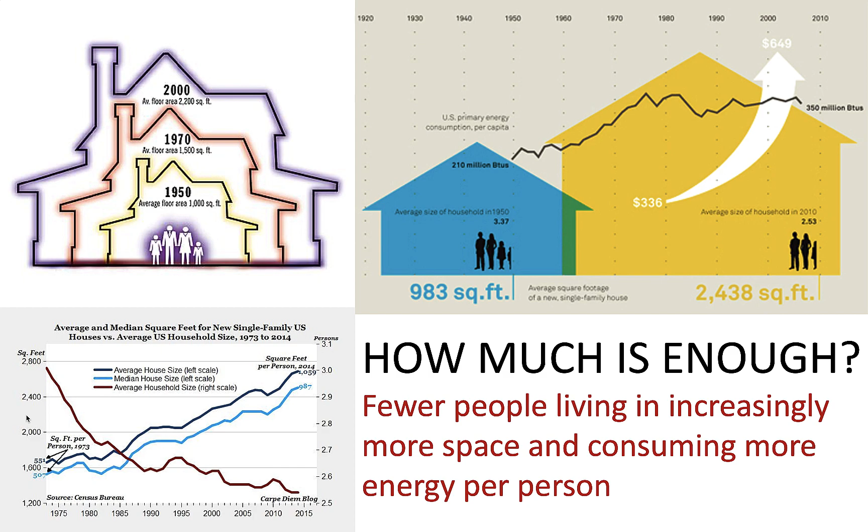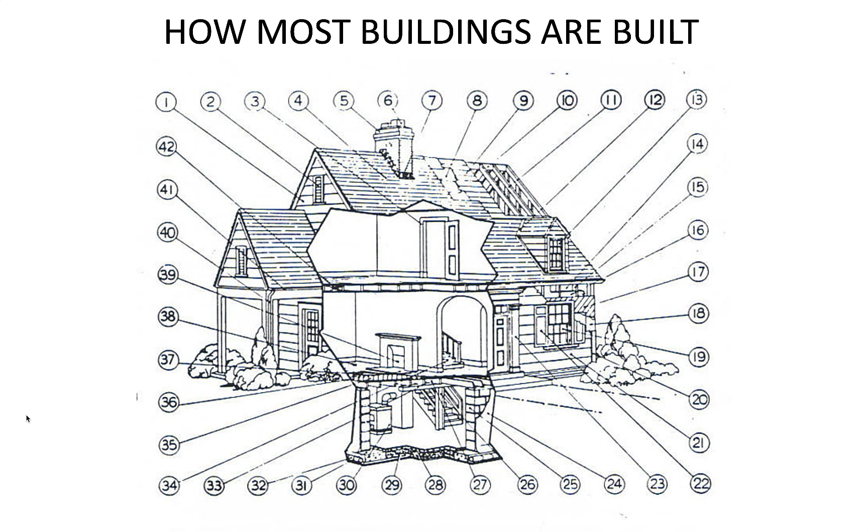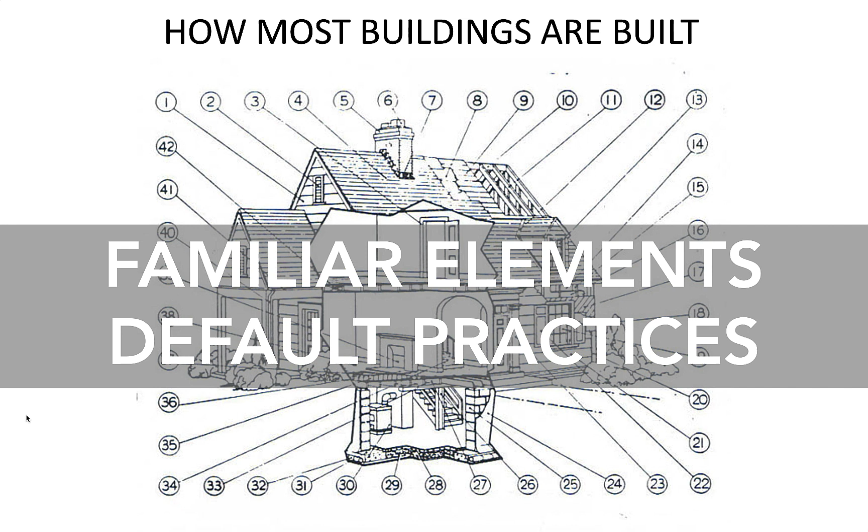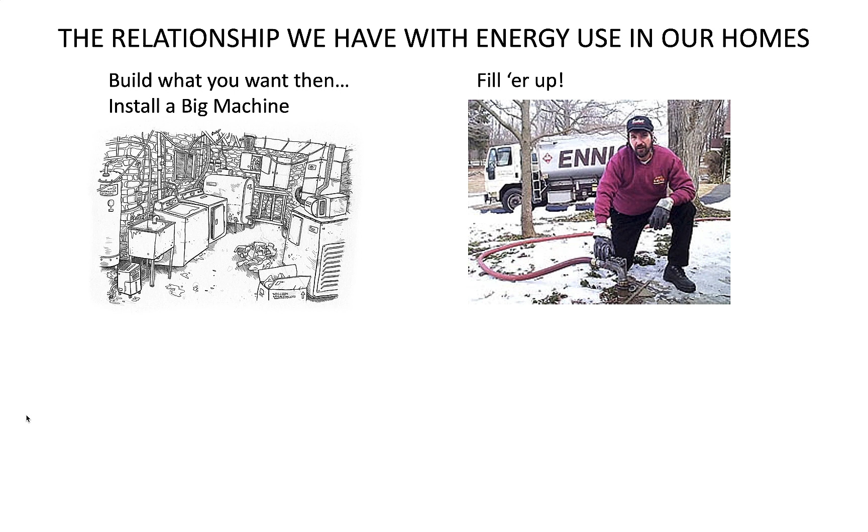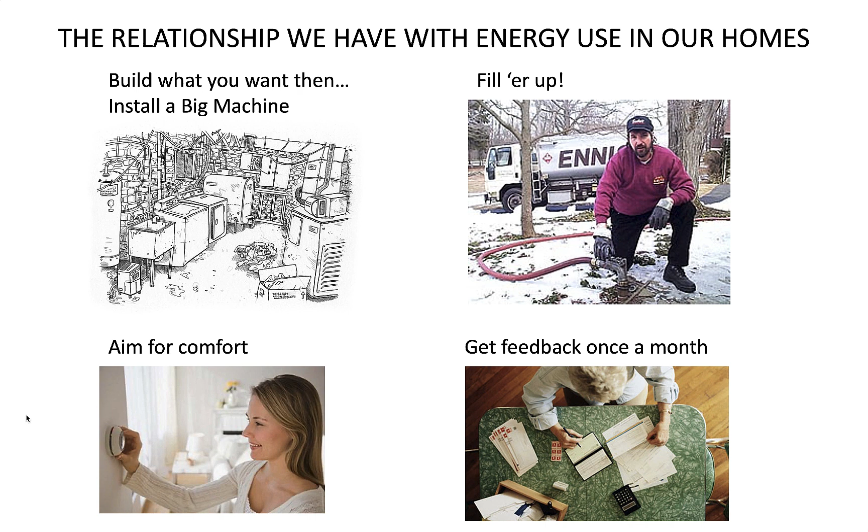One of the reasons homes aren't built this way is because, especially here in the land of steady habits, we tend to keep building the way we've been building, with familiar elements and default building practices. We also build based on a familiar and unquestioned relationship we have with energy in our homes: build what you want, then install a big machine to keep you warm, or at least try to. To keep it running, just fill her up. Then use that dial on the wall to aim for comfort. And every month, we'll get feedback on the cost to maintain that comfort.

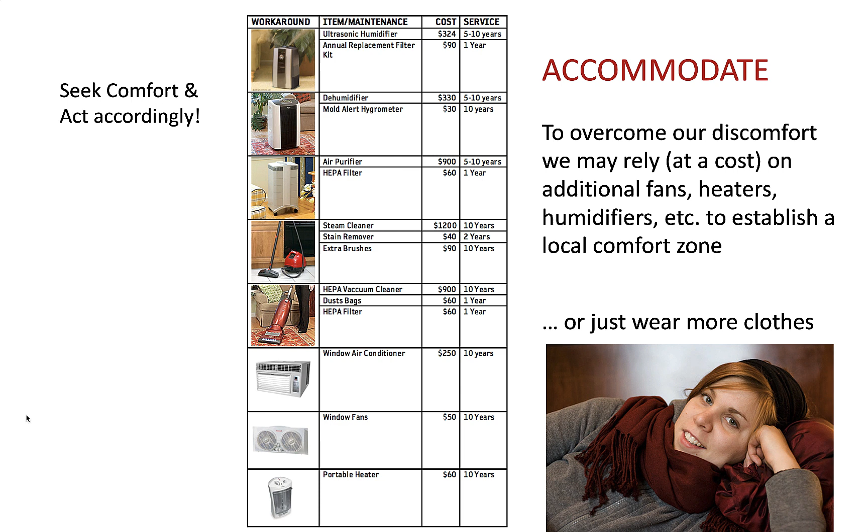This relationship is essentially baked in when the house was built. With that comfort or discomfort equation baked in, we may rely, at a cost, on additional fans, heaters, humidifiers, etc., to establish room-by-room comfort zones. Or maybe we just wear more clothes.

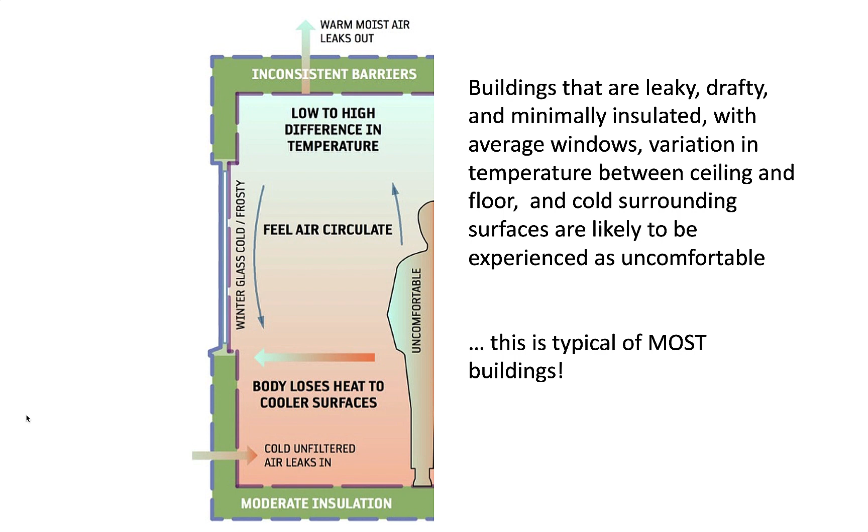This is an illustration of how most homes are designed to perform, with moderate insulation, all kinds of hidden locations that leak the air we are paying to warm and simultaneously draw in cold, unfiltered air. You may feel cold standing next to a window, and the temperature varies throughout the house. We actually feel colder in these homes because our bodies lose heat to the cooler surfaces, and drafts and circulating air feel uncomfortable. By making integrated improvements to the building envelope and mechanical systems, we can provide a more dependable comfort field.

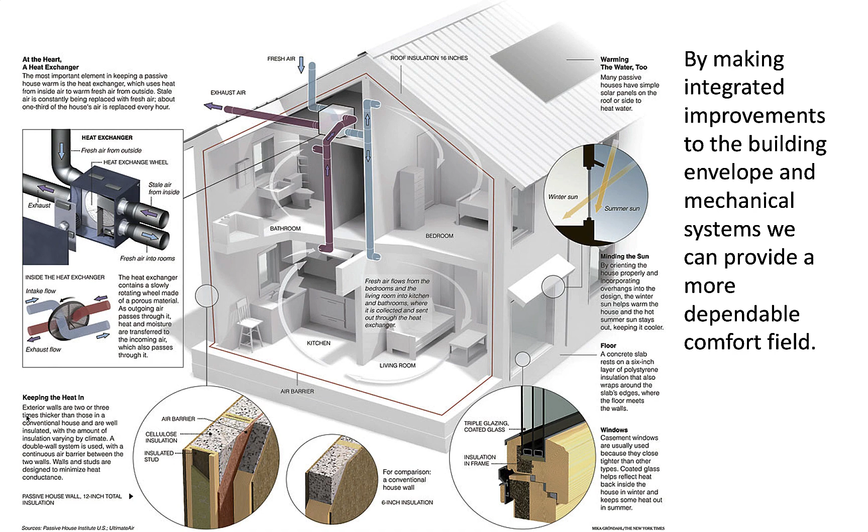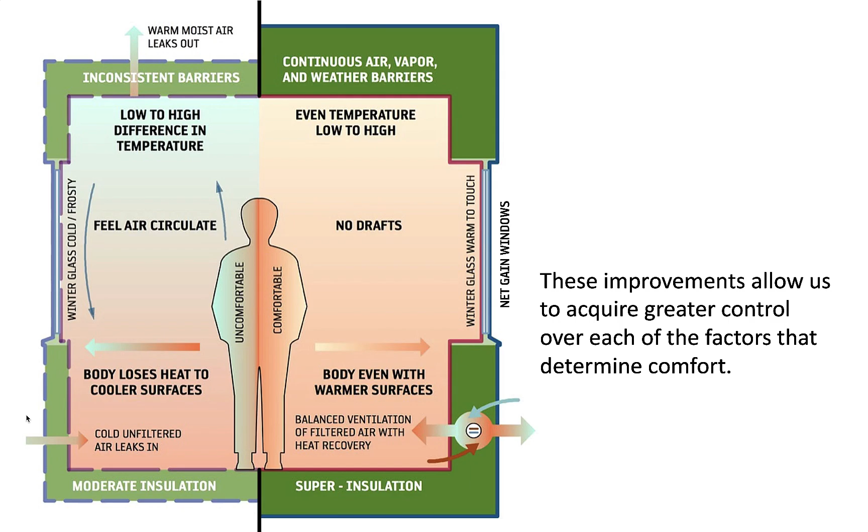With twice the insulation, continuous air, vapor, and weather barriers, efficient windows that can harvest the sun to gain as much energy as they lose, a balanced ventilation system for constant fresh air, and even temperatures everywhere with no drafts and warmer walls, we have gained control of all the factors that determine comfort. And while all of this is a result of adhering to the basic principles of physics, what we value is this: we can be considerably and consistently more comfortable in our homes.

Because perhaps most importantly, there's no place like home. Our home is not just a machine, it is a harbor. Our homes provide us with shelter and security, comfort and well-being. They provide services that meet our practical needs. And hopefully, they delight and renew us, nourish our social relationships, and are often the hub of our active lives. Our homes can also and should sustain our well-being.

Our homes are also a load we carry, and one of our intentions when we build is to lighten that load. Here's an explanation.

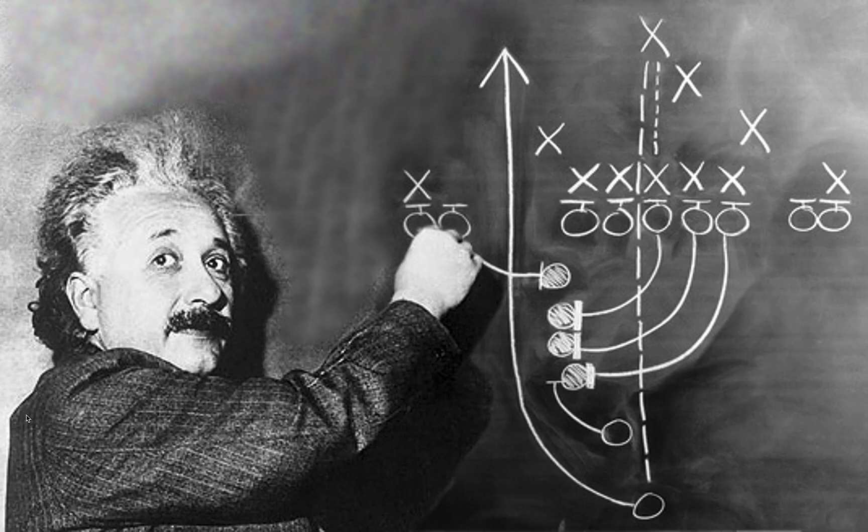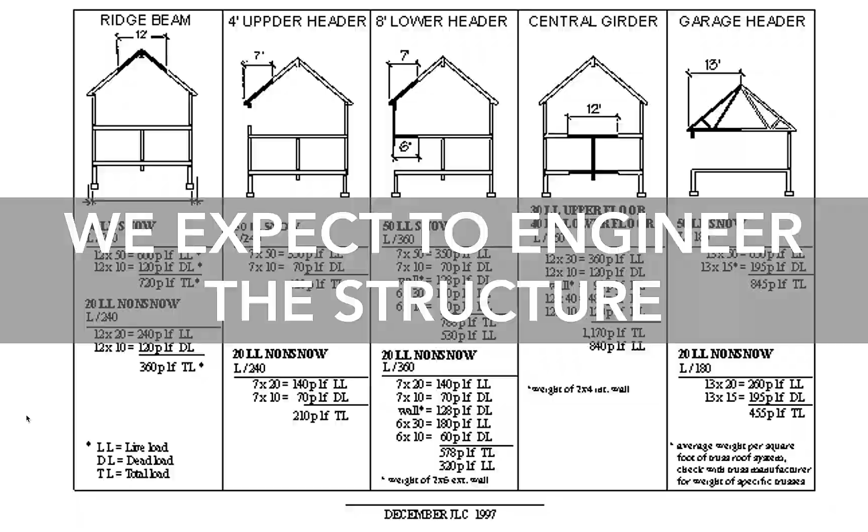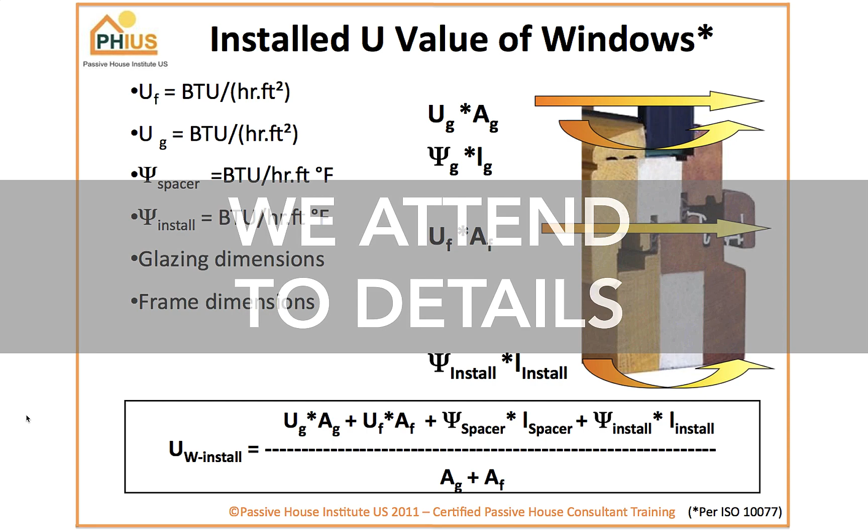So, how do we build differently? For starters, just as for every home, we expect to engineer the structure. For these homes, we engineer performance. We do the math, physics again. And we attend more carefully to all the details.

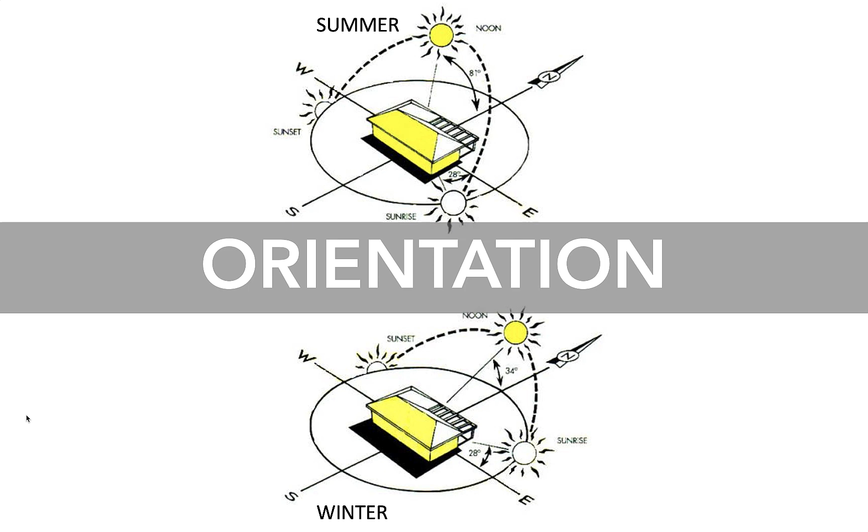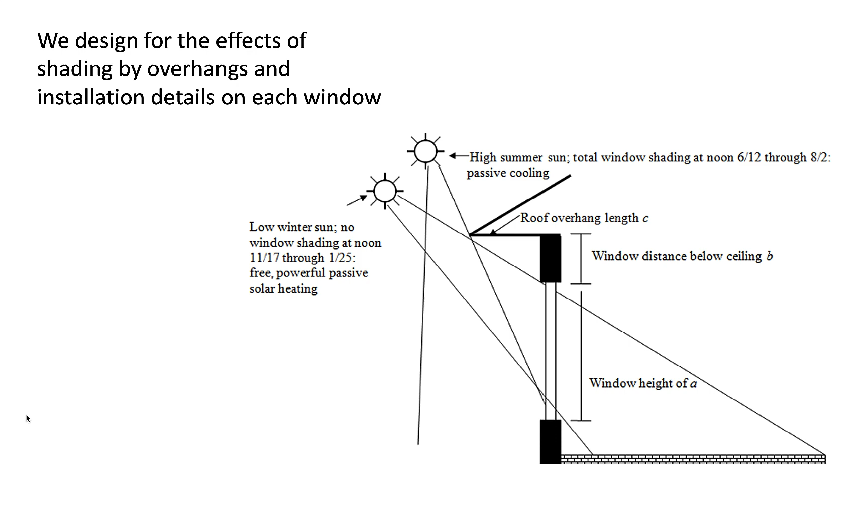We begin with our building site. Since we intend to harvest free energy from the sun, we locate the building to capture all we can. We designed for the effects of shading with overhangs that welcome winter sun and, like the visor on a cap, keep out summer heat. We favor simple, compact forms with the least surface area for the most living area, complicated shapes being less desirable.

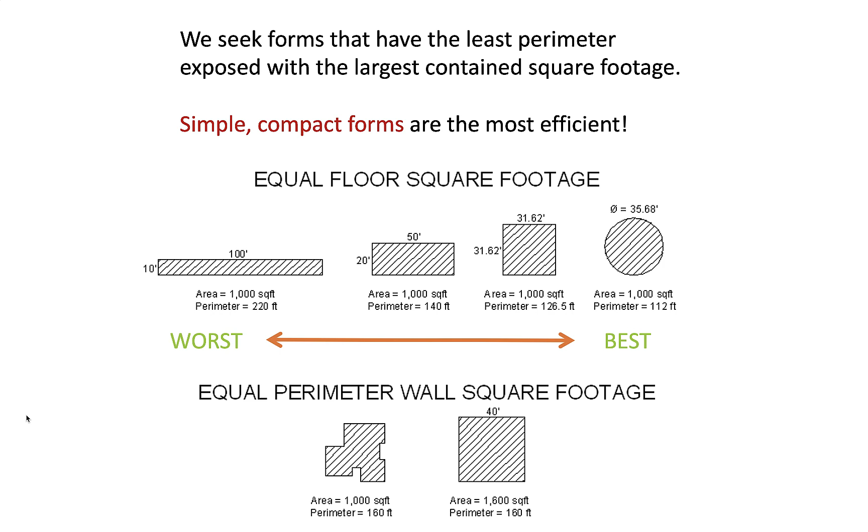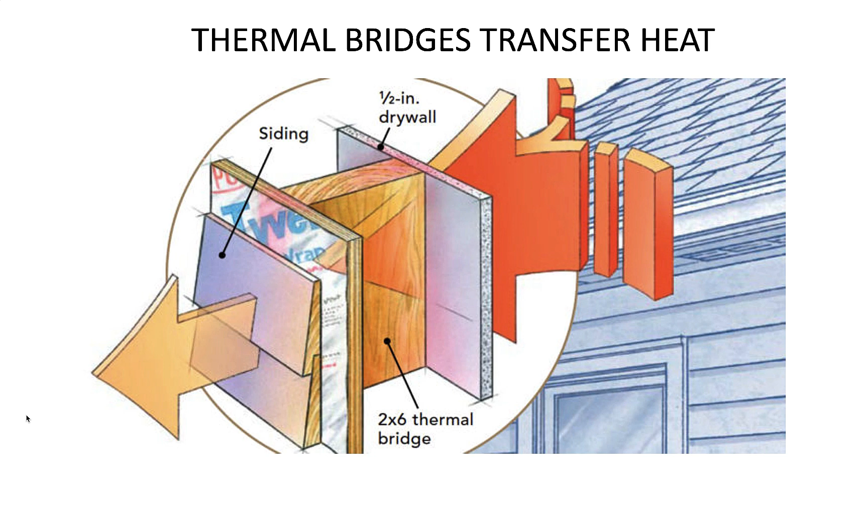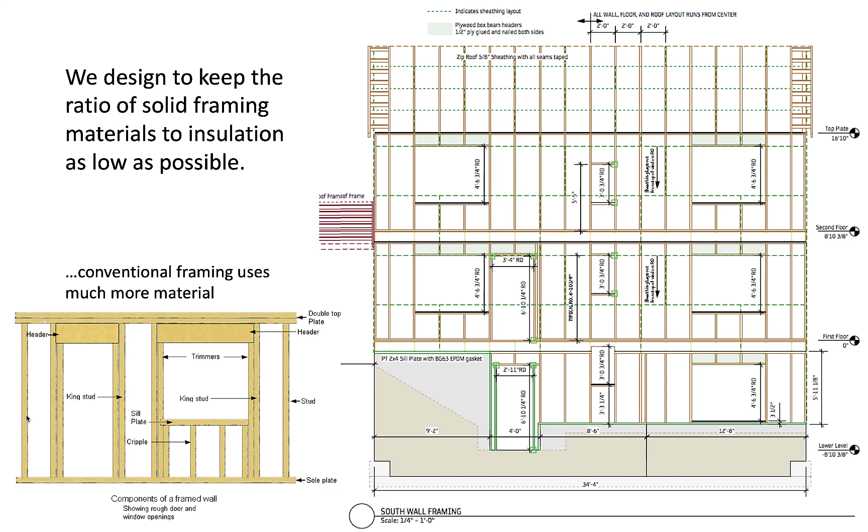We work to eliminate thermal bridges through solid materials that conduct heat and draw energy from the building. We are careful to avoid these conditions when we design the structure or minimize them where they may be unavoidable. Thermal bridges are like the hot handles of a cast iron pan, so we think of this as wearing our mittens. Unlike conventional framing, we design to have less wood and more insulation in our walls.

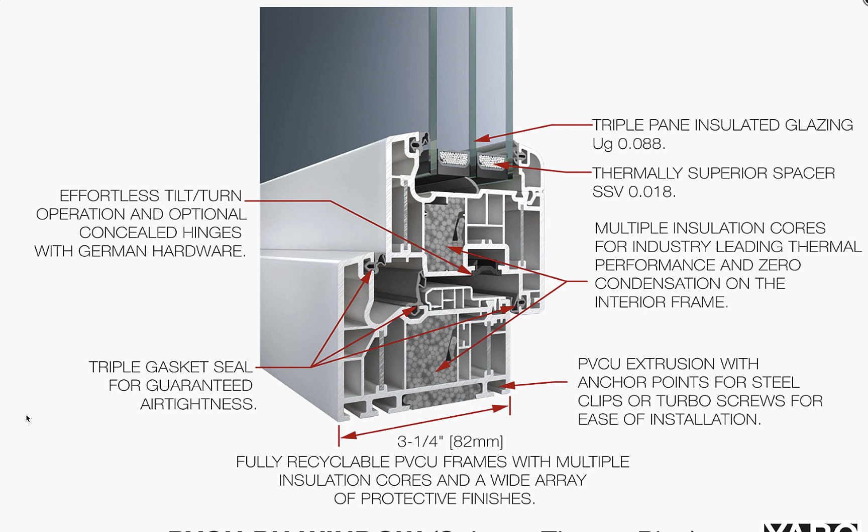And we choose windows that are airtight and triple glazed for high efficiency. We design our largest areas of glass to face the sun with coatings designed to optimize solar gains. These windows actually produce more energy than they use. Thus, we call this net gain glazing. In this way, the windows do a portion of the work of our heating system.

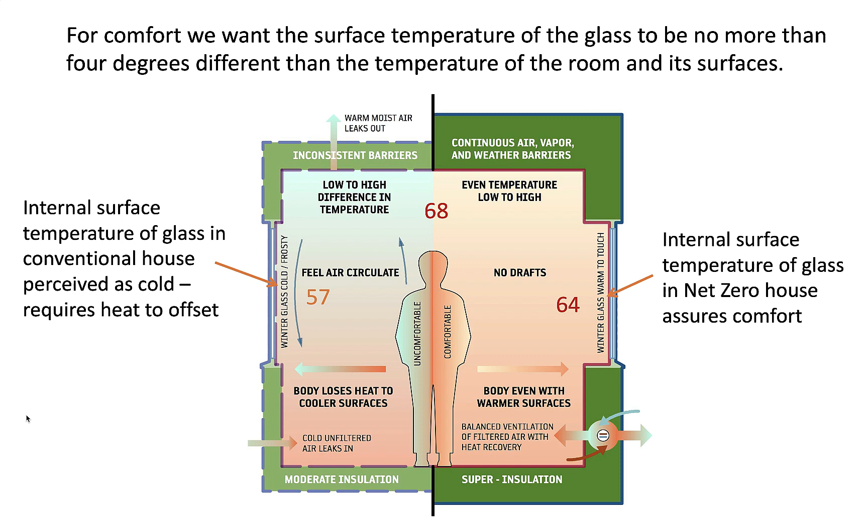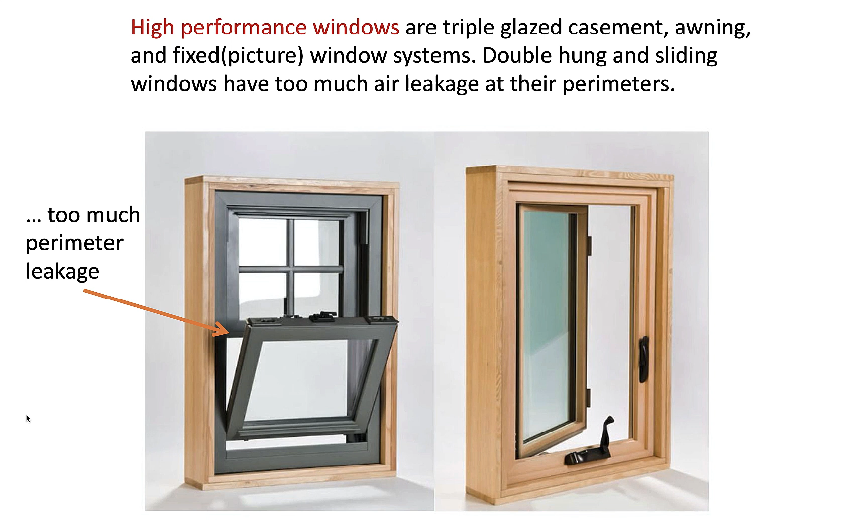And, as we described, the windows play an important role in determining how we experience thermal comfort in the home. We tend to favor windows that seal well, which include casement, awning, and European tilt-turn windows. We avoid double-hung and sliding windows as they have greater air leakage.

Just as we rely on clothes as a second skin to keep us comfortable in different climates, we rely on the building's walls, roof, and foundation, which is our building envelope, to do a number of important jobs. We can think of this as our third skin. And the strategy is bundle up.

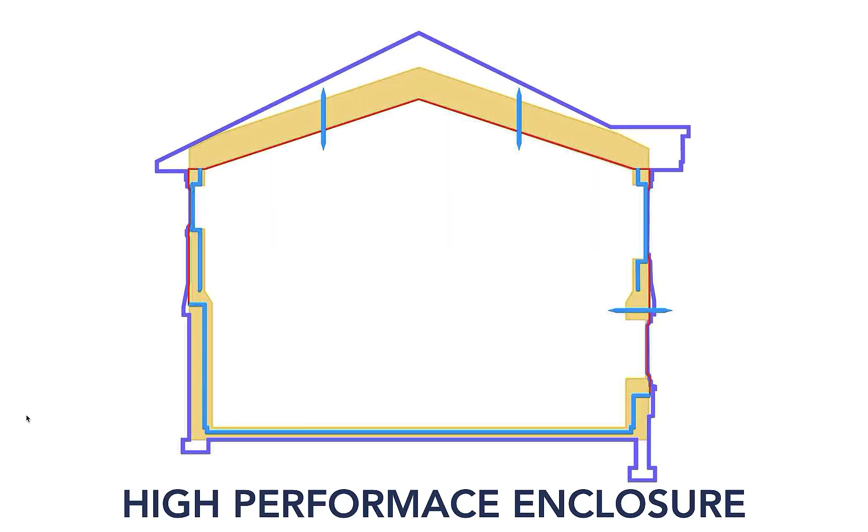So let me introduce you to our building envelope superheroes. In a high-performance enclosure, we rely on our 4 superheroes. We refer to each as a barrier, and each has a different job to do.

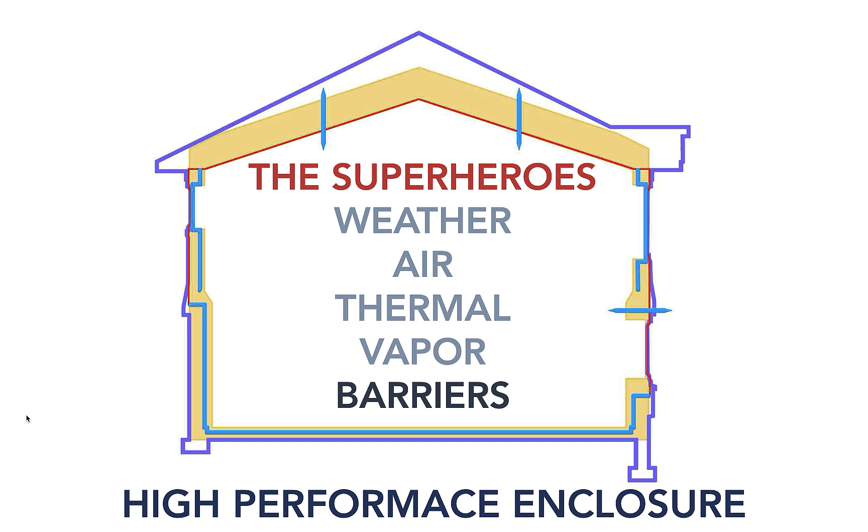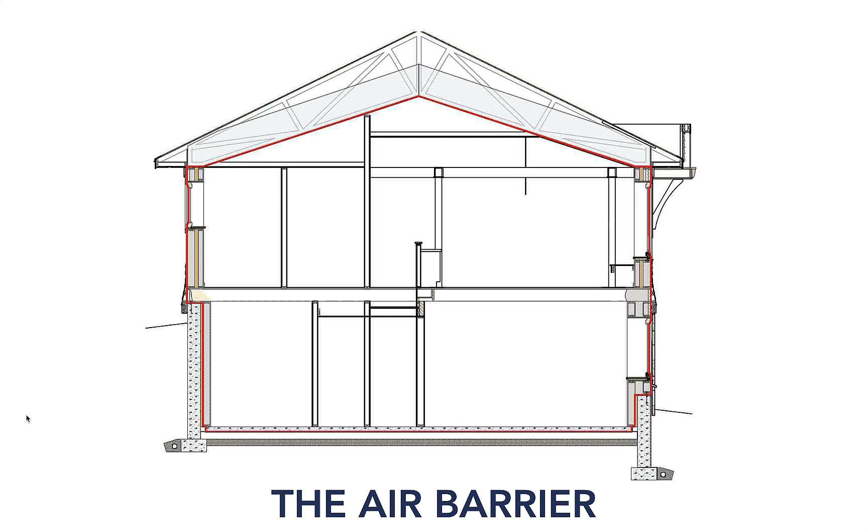Every home relies on a weather barrier, a roof, siding, and windows, and each is designed to provide durability and security. Where most homes can lose as much as 1/3 of their heat through air leakage, our goal is air tightness, and with that, the ability to maintain ventilation control.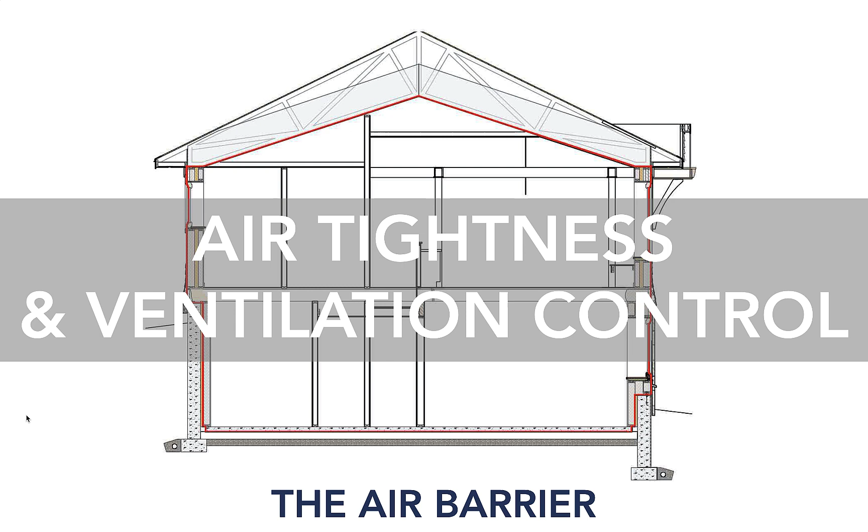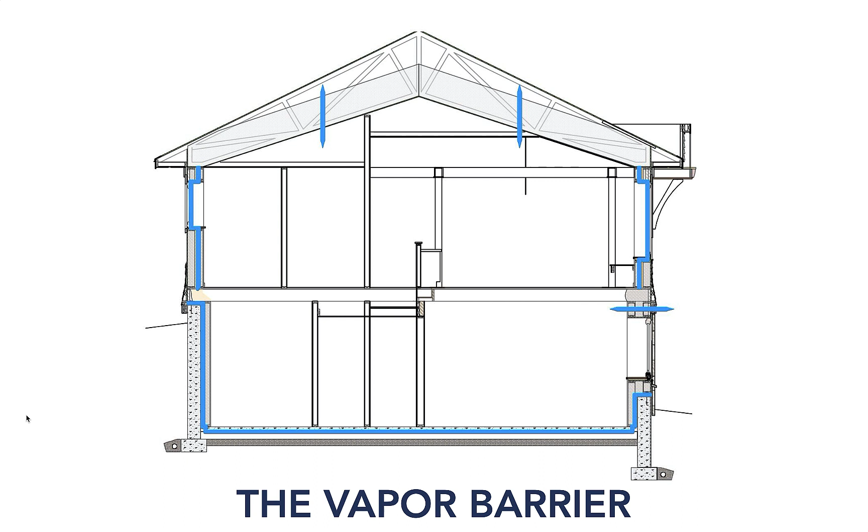The thermal barrier is our thick winter coat, and the goal here is to significantly reduce the thermal transfer of heat. The vapor barrier assures that we do not create situations in which water vapor could condense and become a liquid that could cause rot or create mold in our structure. Our goal is to understand and manage the mechanisms of vapor diffusion.

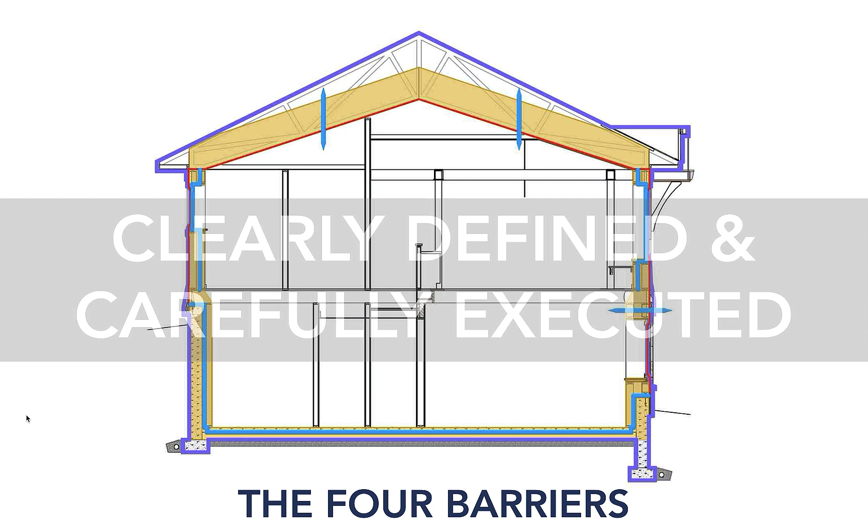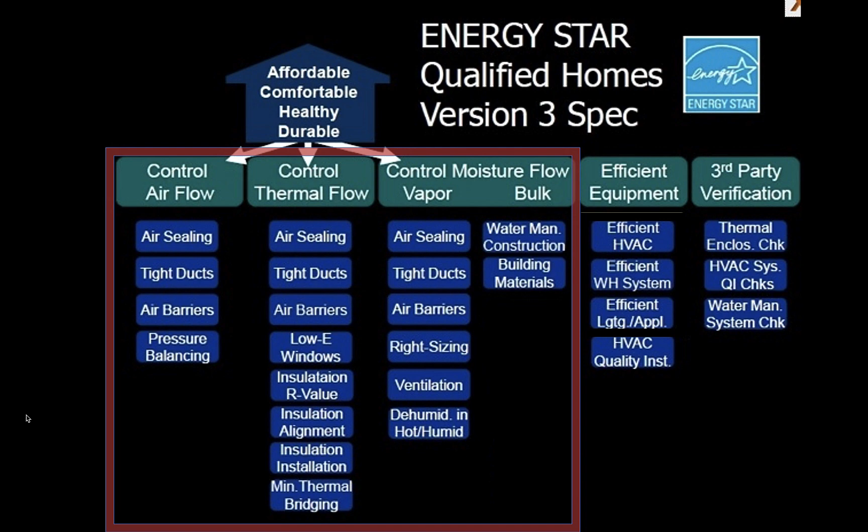Each of these 4 barriers must be clearly defined and carefully executed. We pay special attention to the junctions where walls meet the foundation and the roof. It's no coincidence that each of these features of high-performance homes are the criteria which is inspected and measured by third parties in order to qualify as an Energy Star home.

When we design where each of these barriers will go, we want to be able to draw each one with a continuous, uninterrupted line surrounding the whole enclosure. We want to put the pen down, draw the barrier, and never have it leave the page.

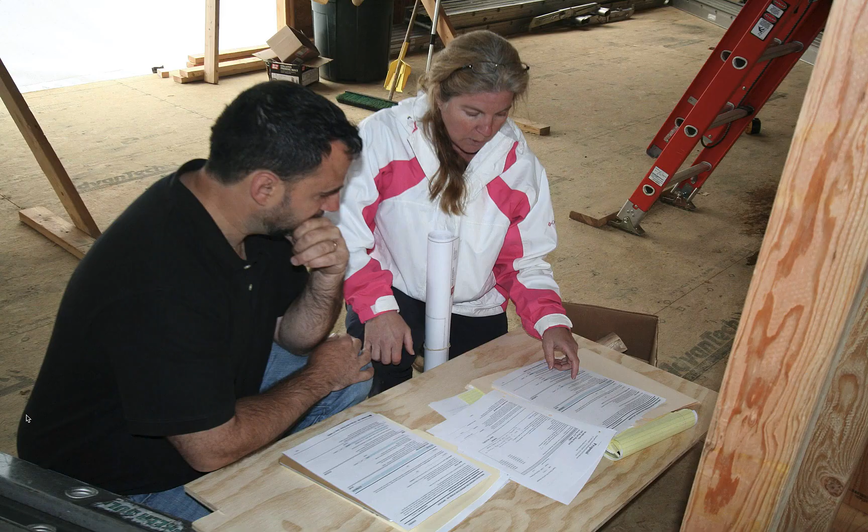When it comes to getting it all built the way it was designed, communication and coordination are critical. Here's Janet reviewing details with one of our trade partners. When we design and build, we need to listen and learn from the voices who speak technically, practically, and of course, aesthetically. Get all the voices to the table and listen.

And no matter how well we engineer the house to perform, the inhabitant plays a significant role in how much energy it will actually use. In this study of 106 passive house and high-performance homes in Germany, the actual energy used varied significantly more and less from home to home compared to what was originally modeled.

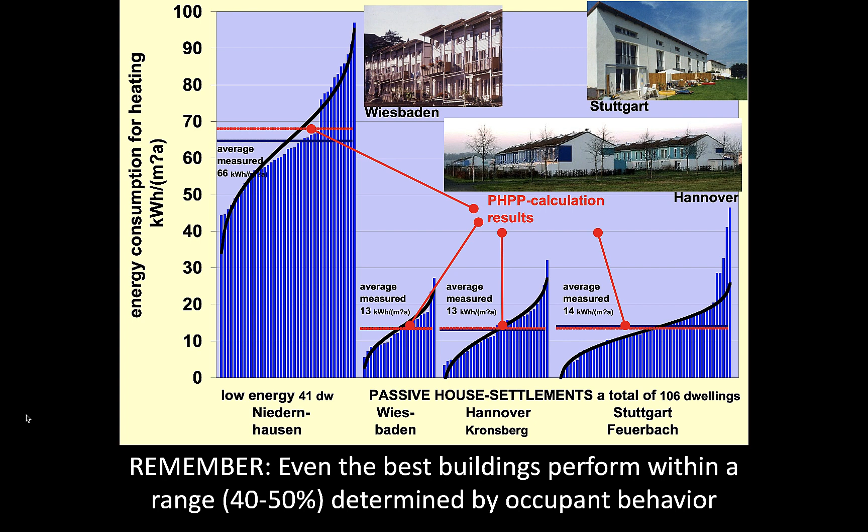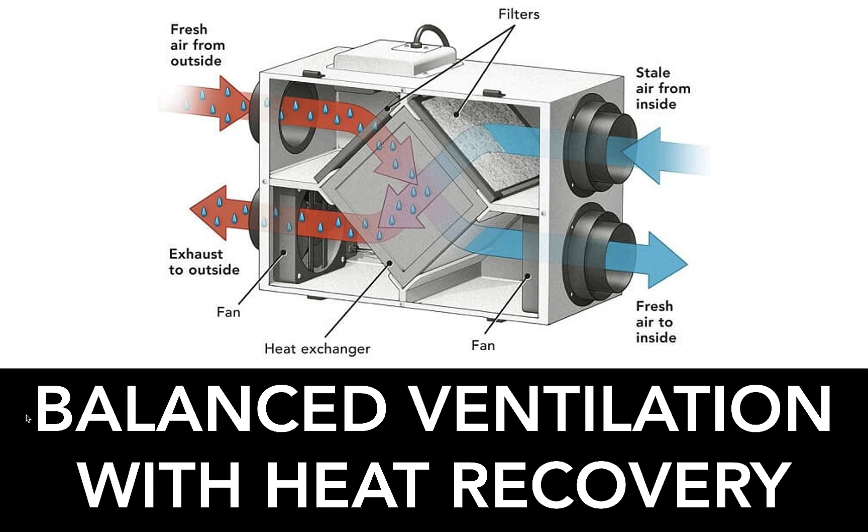Now, folks often wonder how an airtight home provides healthy, fresh air. Well, just like we do, the home actually inhales and exhales the optimal amount of fresh air with a system of balanced ventilation. In this system, stale inside air is exchanged with fresh and filtered outside air while extracting the precious heat from the outgoing warm air. We call this balanced heat recovery ventilation.

The system is designed to bring in the same amount of fresh air that is being exhausted. That's the balance. The system is separated from the system for heating and cooling.

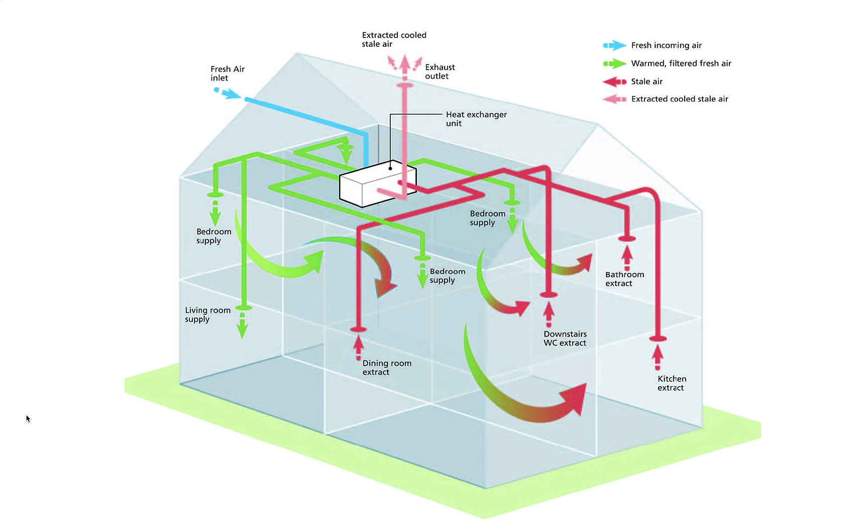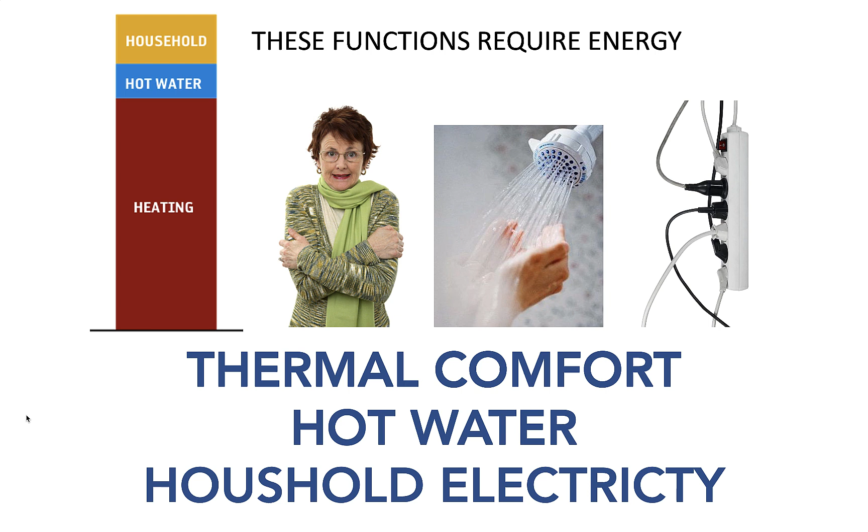So how do we use energy in our homes? We use the most energy in our homes to provide thermal comfort, with hot water and a segment for the remaining electrical stuff like lighting and appliances. Our aim is to meet these needs efficiently.

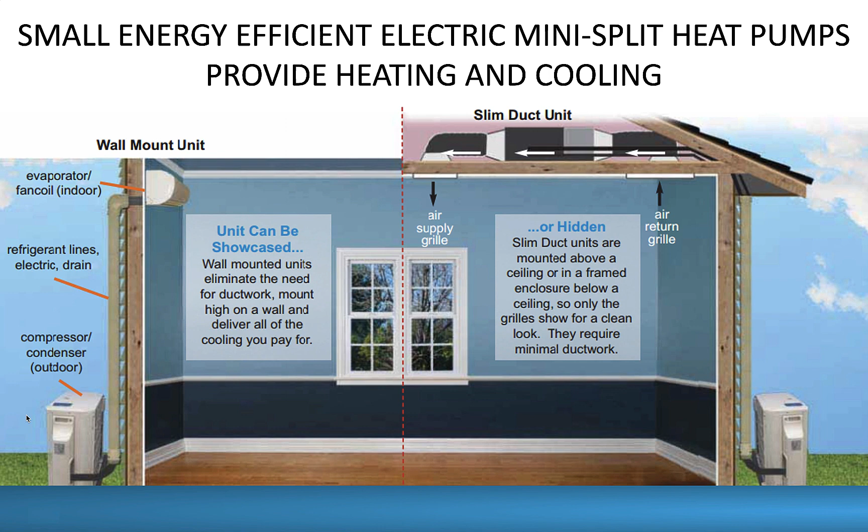By reducing the amount of energy required to heat and cool our homes, we can use small, energy-efficient mini-split heat pumps to heat and cool. We rely on efficient electric heat pump water heaters to provide for our hot water use. And lighting and appliances are selected for their low energy use, with every home we build using induction cooktops.

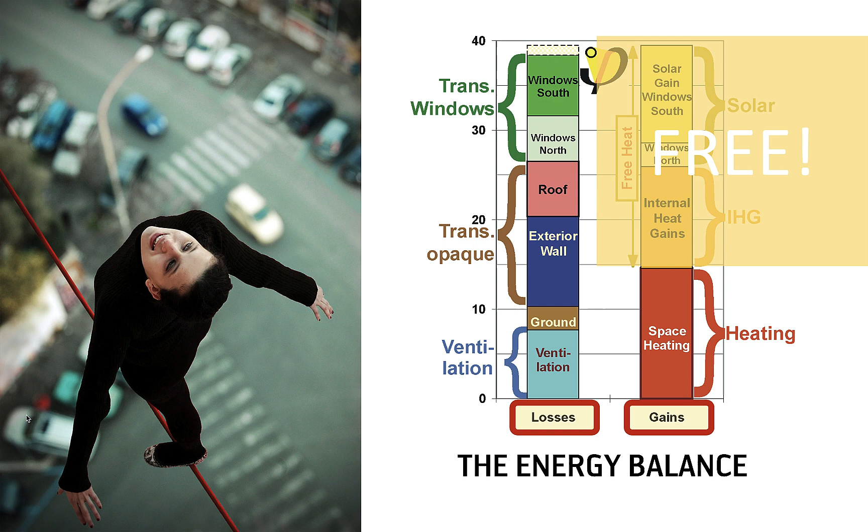Our goal is to account for and manage our use with an energy balance sheet. In this accounting for space heating, we see that all our energy losses, here listed for window, roof, wall, ground, and ventilation losses on the one side, are balanced by free gains from the sun and the remaining fraction covered by our highly efficient heating system.

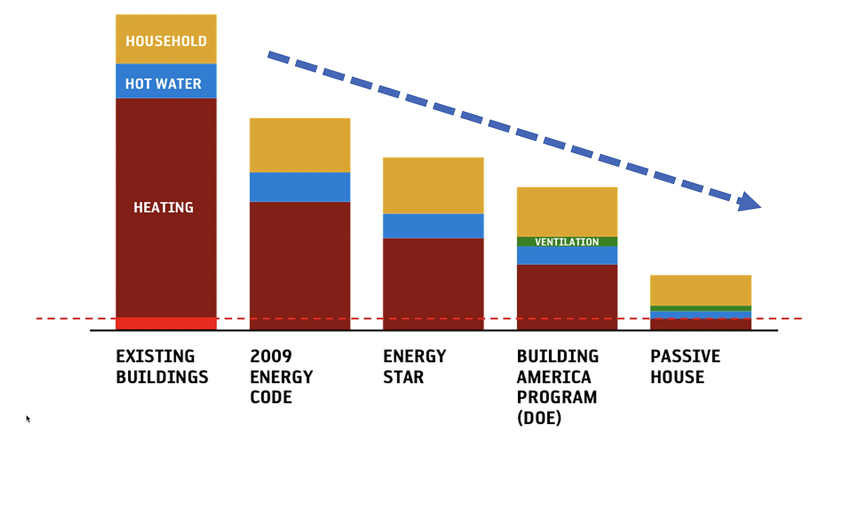As the expense of energy has increased, we have been working to make homes more efficient through building codes, energy-saving programs, and new design methods, with homes built to the passive house standard using a sliver of what many existing buildings require. If we invert our energy profiles and consider the amount of energy it is practical to produce on site...

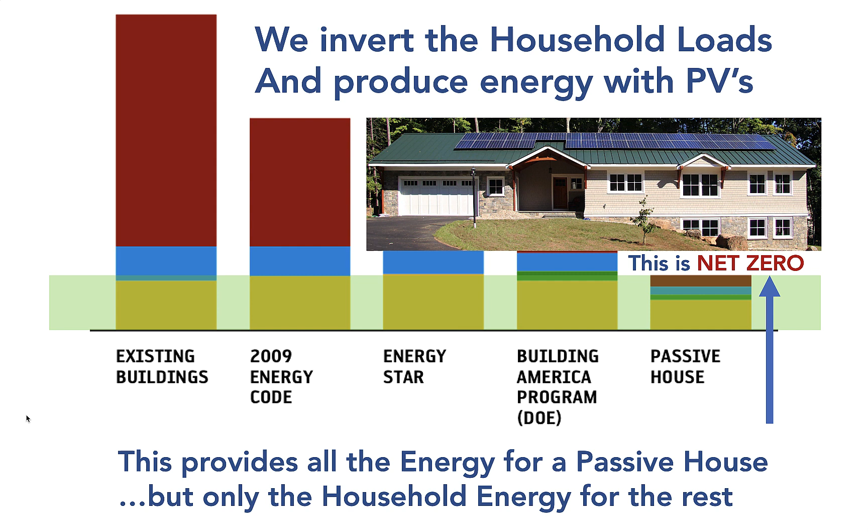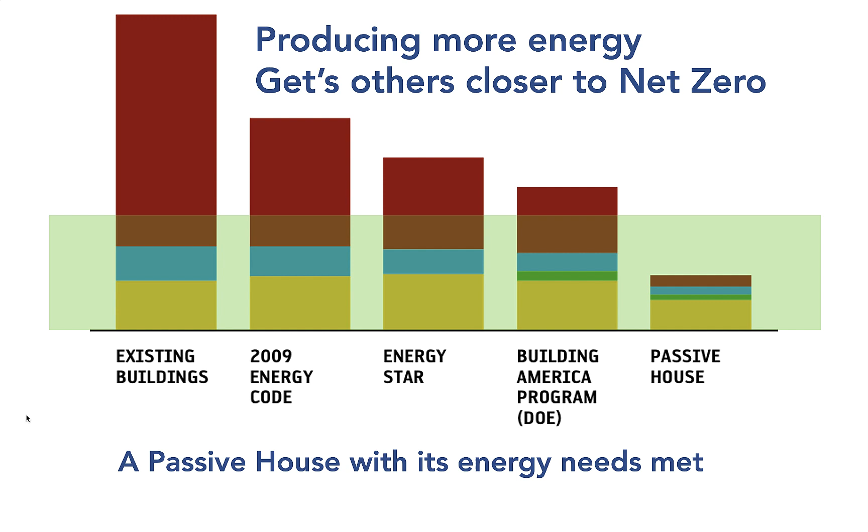We will see that we will achieve net zero for a passive house, but only satisfy the household energy consumption for the rest. Producing more energy gets others closer to net zero for the advanced homes, while the passive house, with its need met, can provide energy for an electric vehicle.

So this is what net zero means for us. The amount of energy we require for comfort and operations equals the amount of energy we are able to produce on site on an annual basis. At net zero, we buy nothing. To achieve net zero, we produce everything.

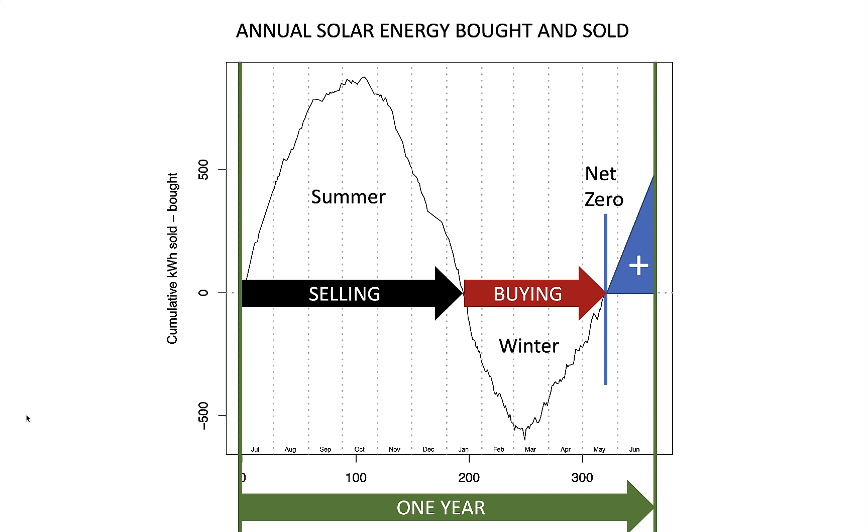This is data taken from a net zero home we built in Farmington. It shows that they achieved that net zero break-even point about 5 weeks early. Thus, the home is net positive.

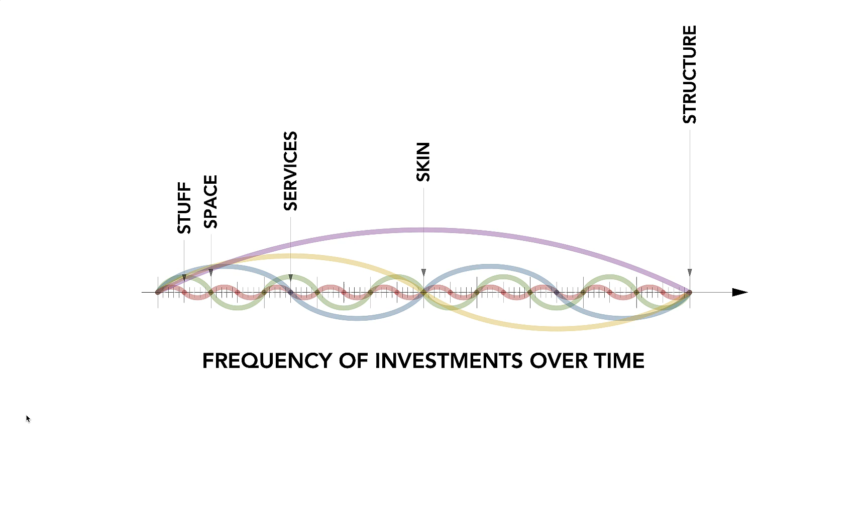This book by Stewart Brand provides one of the most important contexts for the process we are discussing. At its essence, he asks what makes a building get progressively better over time, and what contributes to it becoming worse. He offers this useful framework for thinking about layers of change over time, with the site being permanent and sequential layers of the building changing at different frequencies. These changes oscillate progressively from the churn of stuff to the permutations of space to the service life of equipment and services, to the performance lifespans of the skin, and finally, and most deeply, to the enduring capacities of the building structure.

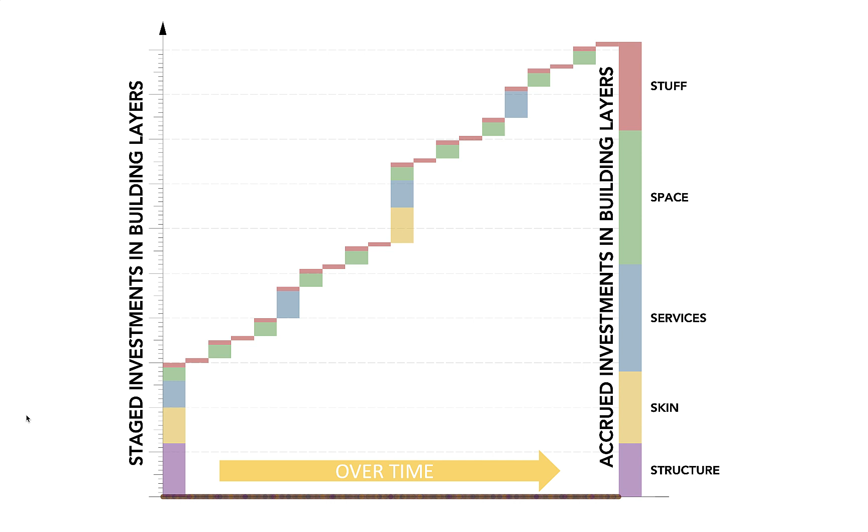Each investment locks in that decision's service life and quality. When we view the investments made in each of these layers and their frequency over time, we may conclude that investments in the structure and its skin are eventually dwarfed by the more transient layers of the building. This invites us to advocate for investing in these qualities when we have the opportunity, because those opportunities come infrequently and may matter most.

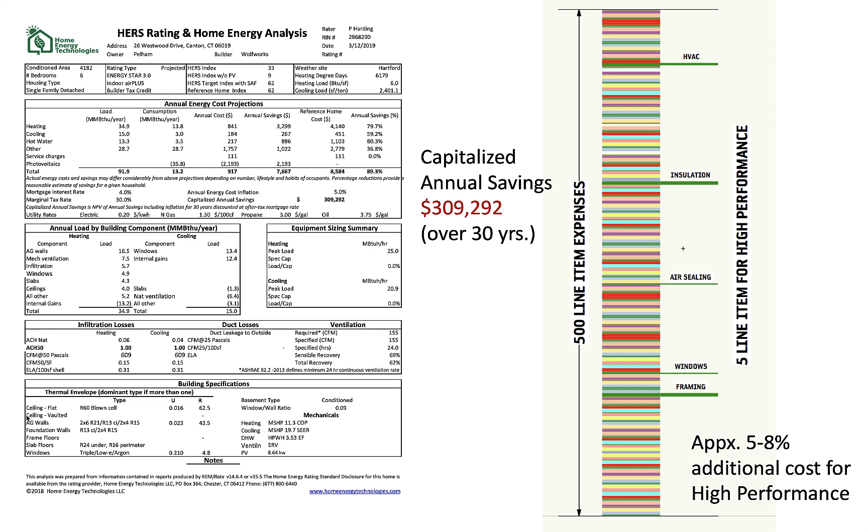Folks often ask, how much more does it cost to build this way? If we consider that of the 500 or so items we buy to build a house, we need to invest more in only about 5: insulation, air sealing, windows, and some additional framing, plus that special ventilation system. This may amount to 5 to 8% of the cost to build the home. In this energy report, we see that the savings accrue by a factor of about 10x, so you are spending a little to save a lot over time.

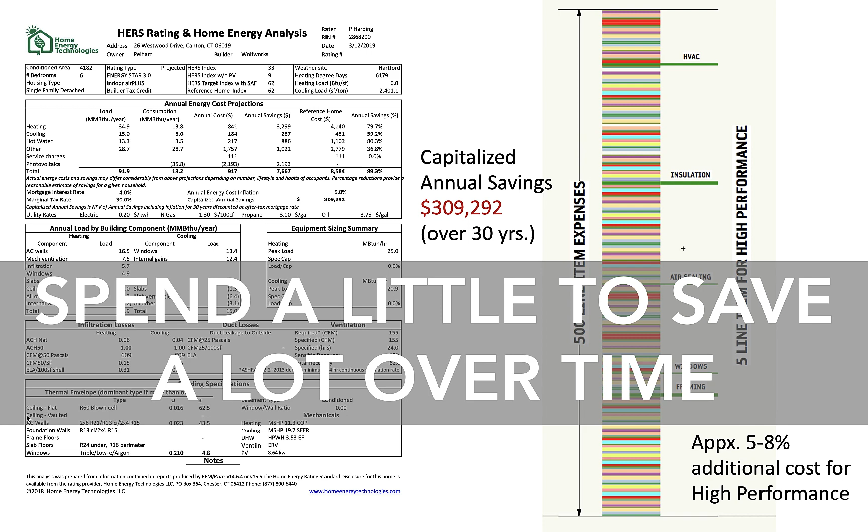So let's review. What should we do? Well, remember to bundle up. Hats, boots, jacket, mittens - these are metaphors for the building envelope and all the things we showed that the superheroes accomplished for us. And then find your balance. Calculating the energy balance is essential in all these projects and homes. And remember, invest in the skin and structure when we have the opportunity, because those opportunities come infrequently and may matter most.

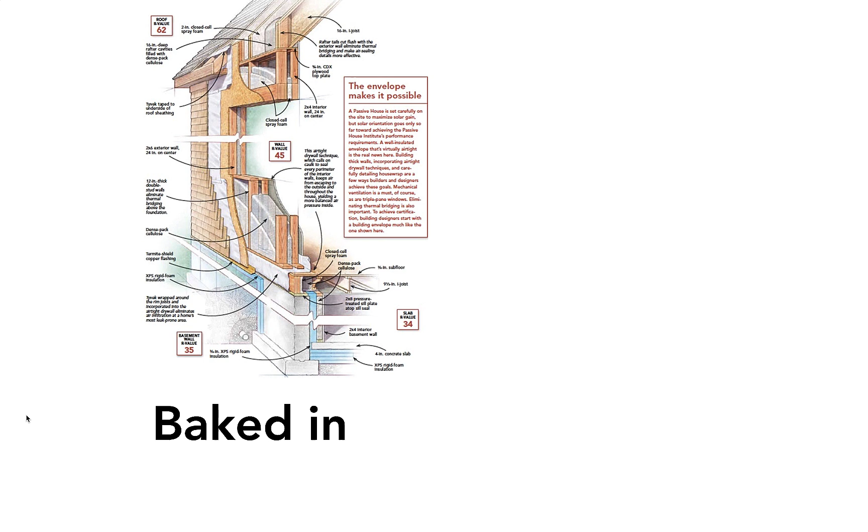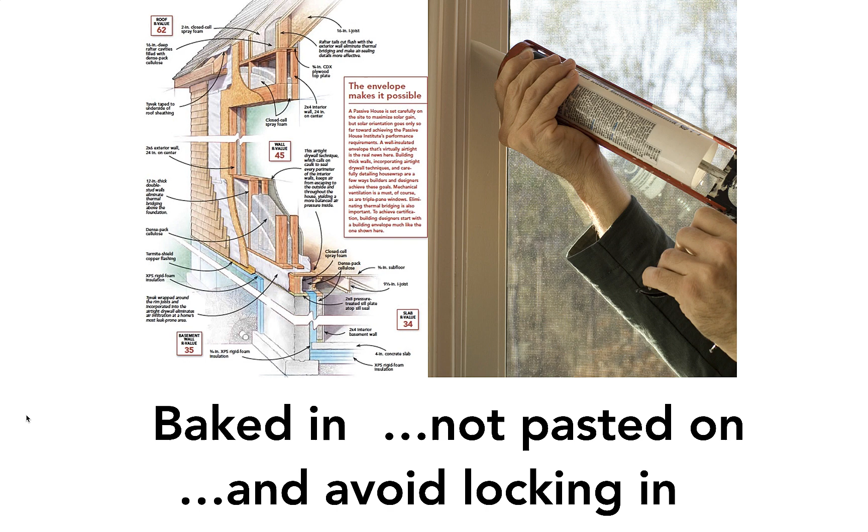Recognize how important it is that the strategies you seek to employ need to be baked in, not pasted on, so that you are avoiding locking in high energy use. I like to say that high performance requires that designers perform, that builders perform, and that materials perform.

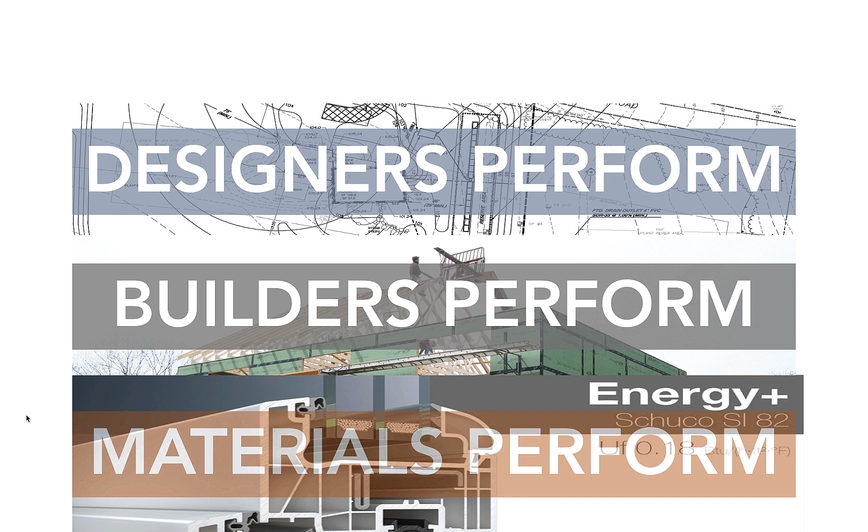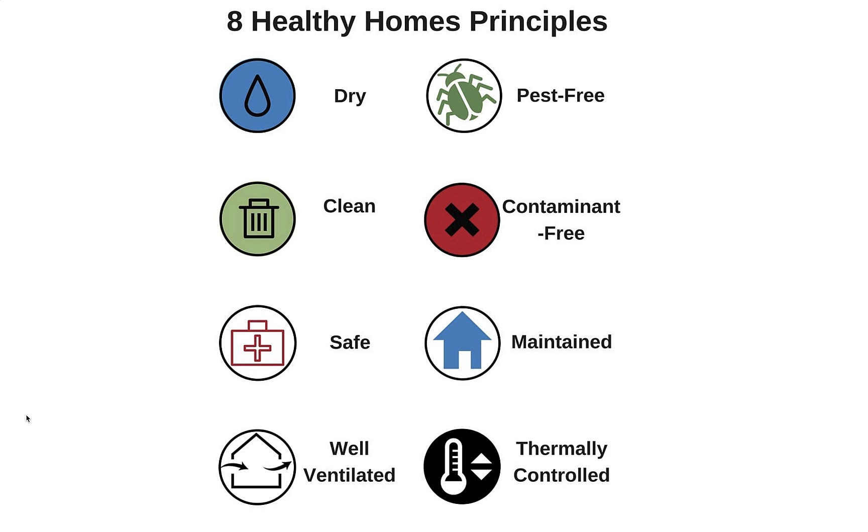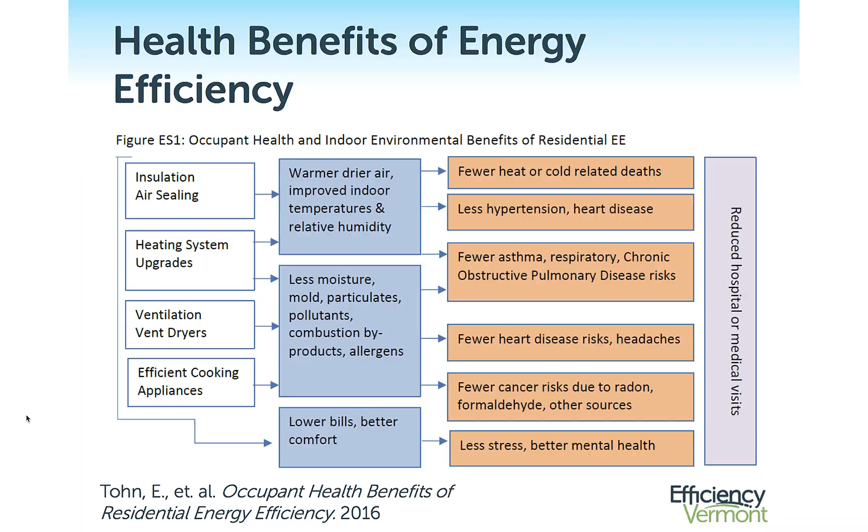Now, what more do we need to do? Well, we need to look beyond energy to health and recognize the role homes play in living well. When we look at the keys to a healthy home, we need to recognize that these are all baked into a net zero home. Studies connect the dots to reach this conclusion. Net zero homes reduce hospital and medical visits. The frameworks that healthy home advocates promote align perfectly as well.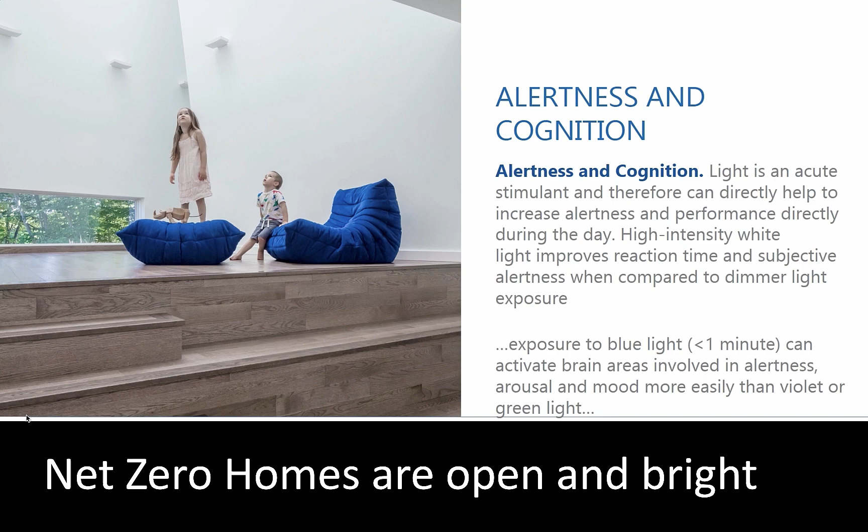And how about sleep? If home is our new doctor, then maybe light is medicine for sleep, as well as alertness and cognition - net zero homes are open and bright. The WELL building standard frames these same building and design methods around wellness.

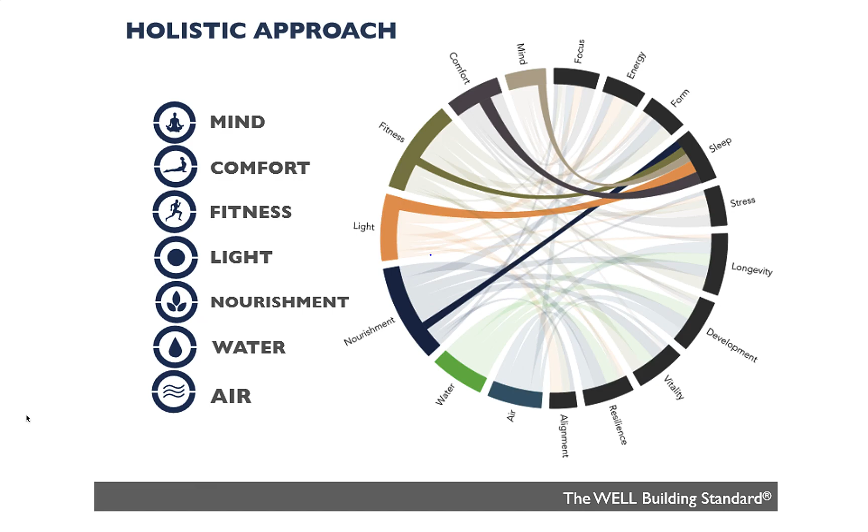So, we also need to recognize something that we generally take for granted. Energy is precious. Consider pushing a car the distance it travels when powered by fossil fuels.

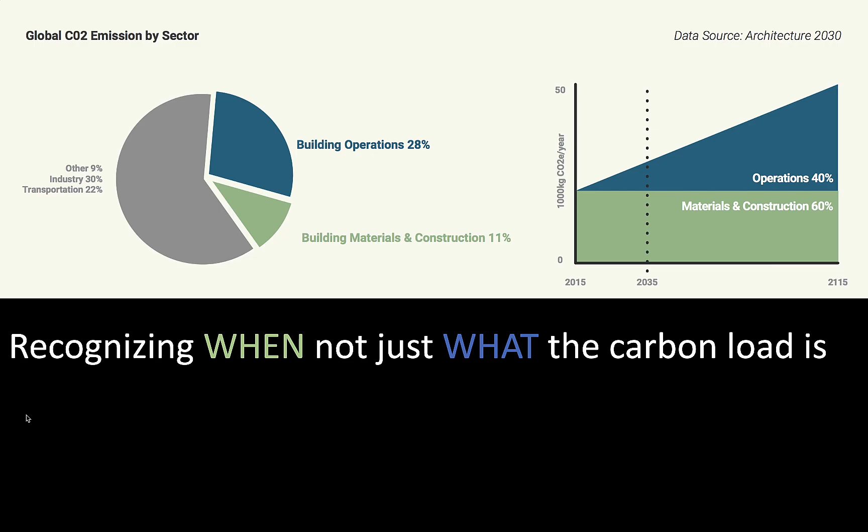And how we choose to build matters now. And as important as it is to build homes that can be powered by the sun, we need to think about the impact of building itself. The process of extracting resources and manufacturing materials has an impact now. We need to learn to consider and favor materials that actually store carbon. And while there are many options for materials that do this, many are not readily available or affordable. We have a lot left to learn here.

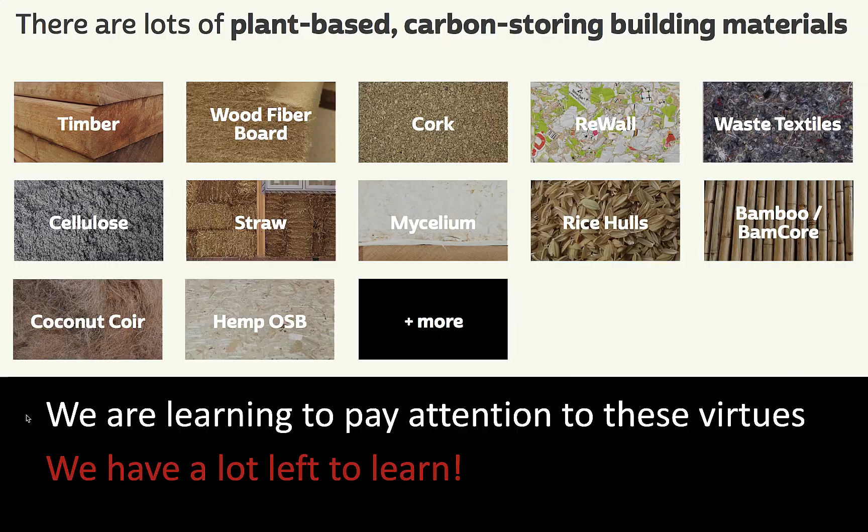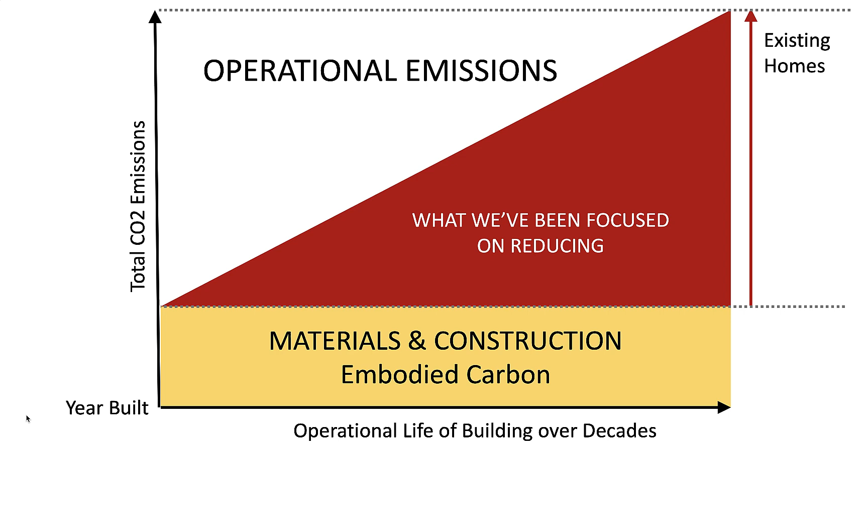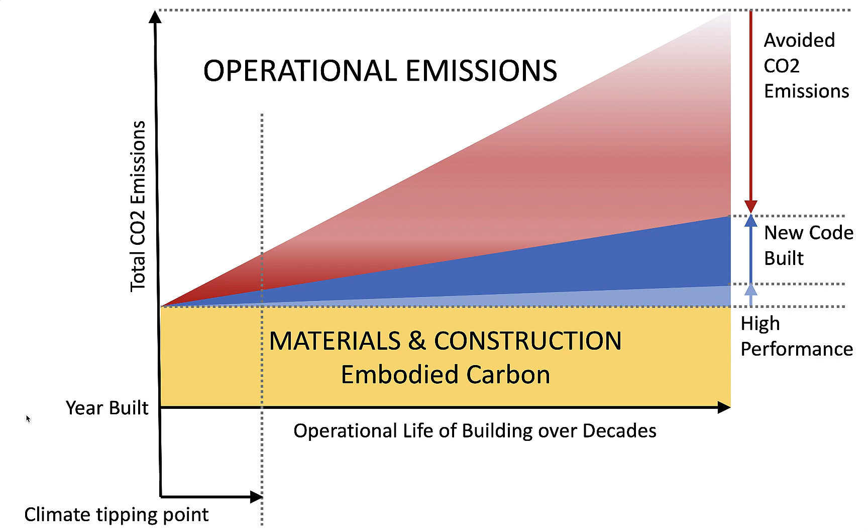So, with the burden of operation emissions, shown here in red for existing homes, so large, we've been focusing on reducing that load. As we've succeeded in reducing that load over time, shown in blue here, it becomes apparent that the impact has shifted to the embodied carbon in materials and construction itself, especially as we approach the climate tipping point.

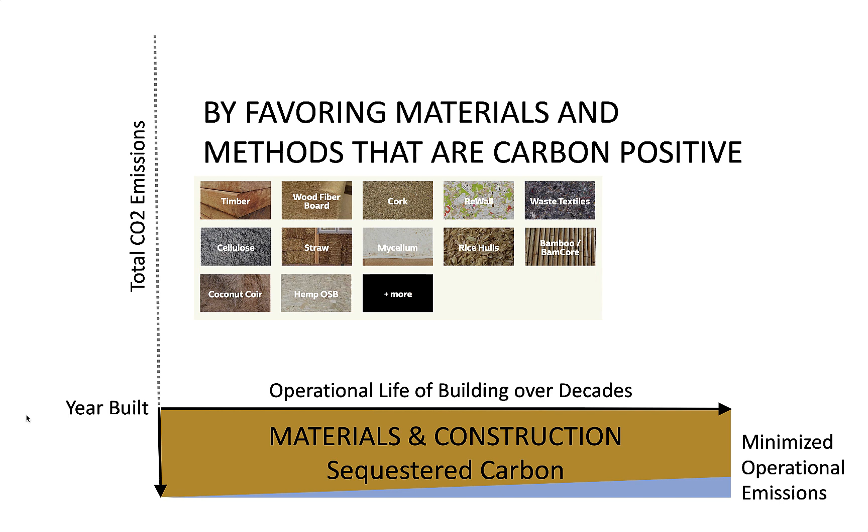By favoring materials and methods that sequester carbon, we aspire to bake in and lock in a carbon positive position in this equation over time.

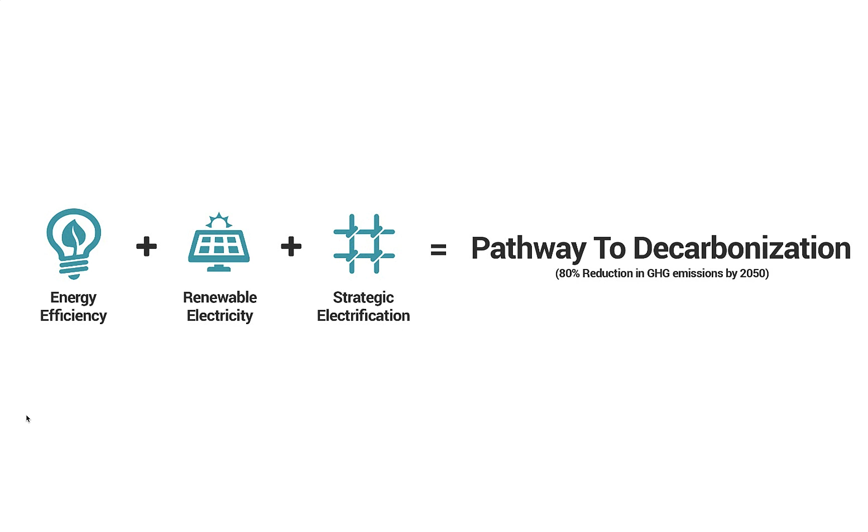Finally, we see the importance of shifting to an energy system integrated around a principle of strategic electrification. Of all things, we are hearkening back to the days of Reddy Kilowatt and advocating that we can, in fact, live better electrically. By combining energy efficiency with renewable energy, which we refer to as reduce, then produce, and updating systems of energy storage and distribution through strategic electrification, we are on a pathway to decarbonization.

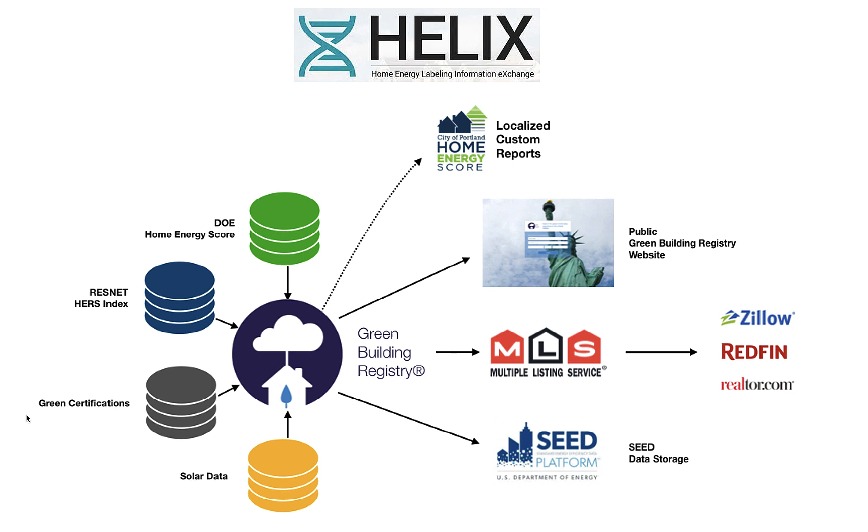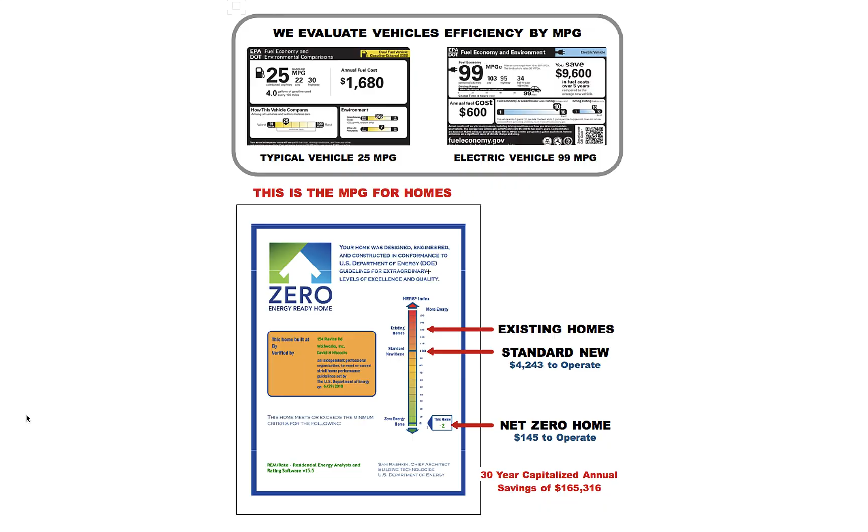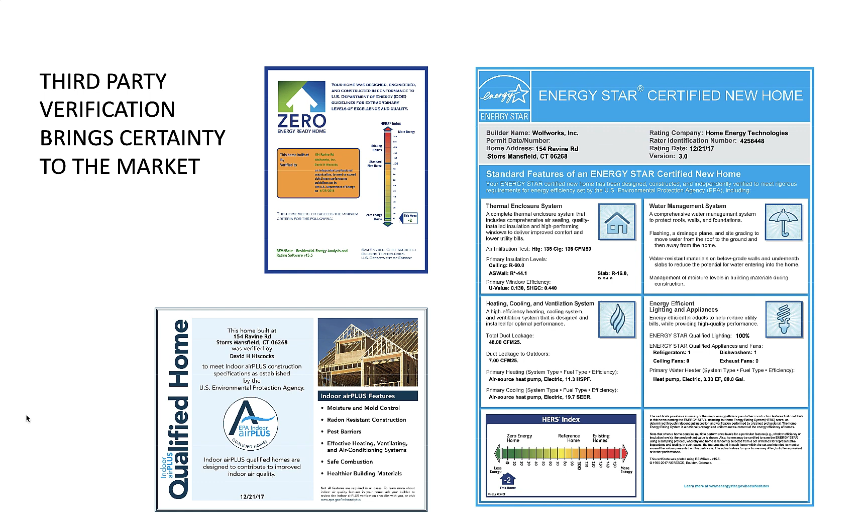And with it, we need third-party verification to bring certainty to the market with systems like Energy Star and the EPA's Indoor airPLUS designation.

And again, let's not forget that we want to craft homes of lasting beauty and conviviality. They're not just machines. This is as important to us as energy performance. Our work has been featured in several of Sarah Susanka's Not So Big House series of books, as we both subscribe to that right-sizing ethic that favors quality over quantity of space.

We believe in building better. We believe that a better home supports a better life while making a real contribution to a better planet. We hope you agree.